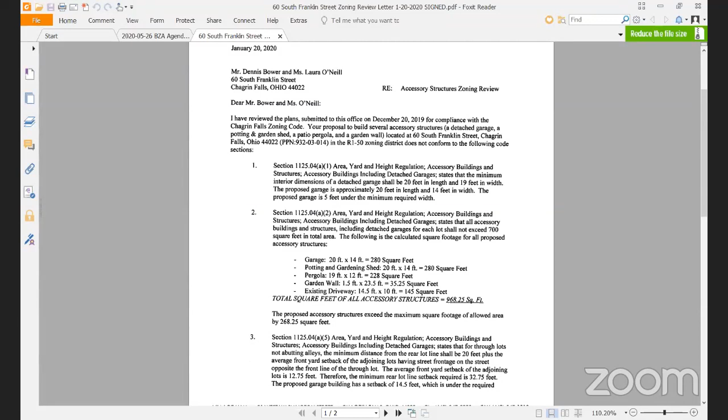So all that being said, the first application before us is that of Dennis and Laura Bower, 60 South Franklin Street. Rob, I turn it over to you. Could you please give us the background that it looks like you're able to project on the screen for us here as well? Yes, and I also want to start out by saying we have quite a few documents for each one of these 4 projects. I'm going to attempt to bring them up as we start to digest each project. If you want me to toggle between different documents, just let me know, and the screen will show what we need to show.

Starting off for this project, 60 South Franklin Street, the applicants, Mr. Dennis Bower and Miss Laura O'Neill, are proposing to build 4 accessory structures in their rear yard, which consist of a detached garage, a potting and garden shed, a patio, pergola, and a garden wall. This is in the R1-50 zoning district at permanent parcel number 932-03-014. They are before us today for a total of 4 code sections that require variance.

The first is section 1125-04A1, the area, yard, and height regulations for accessory buildings. This pertains to detached garage size. The minimum interior dimensions of a detached garage shall be 20 feet in length and 19 feet in width. The proposed garage is 20 feet in length and only 14 feet in width. So the proposed garage is 5 feet under the minimum required width.

Dale, I have Bill Childs coming. Would you like all three at one time or one at a time? I would do one at a time because I can only see one. Well, actually, no, I take that back. You could put all three of them on and I'd be able to see them if you add them. If my list is correct, I have Bill Childs, I'm promoting to a panelist, and the Bowers, and Mrs. Burt, promote to a panelist. If there are any other members in attendance, I see another hand. I will promote you, Brenda Anthony, promoted to a panelist.

Okay, so we have Virginia Burt, Bill Childs, Laura Bower, Brenda Anthony, and who's the other one? That's the extent of it. Okay. All right, so Laura Bauer, I can't see. She and Brenda Anthony need to get their video going. I requested the Bowers to unmute. Okay, who's on the screen for Laura Bower? This is Dennis Bower. Dennis, okay, gotcha.

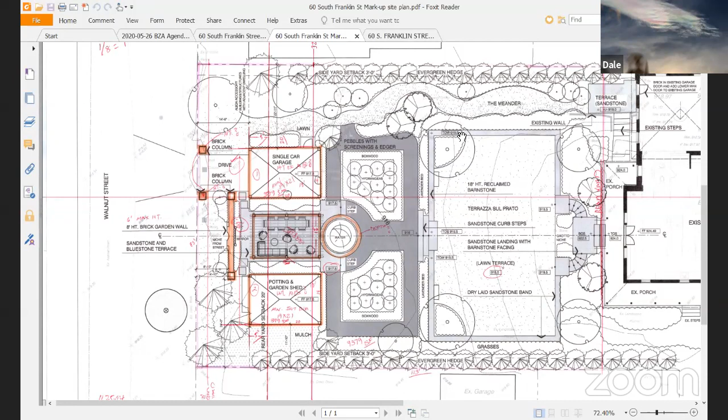All right, so I'm gonna ask each of you to raise your right hand. If you swear to tell the truth, the whole truth, and nothing but the truth in front of the Board of Zoning Appeals tonight, please say I do. I do. I do. Okay, I verified all four have been sworn in. Okay, thank you. I assume you're all tag teaming. We don't have audience participation yet. You're all participating in the presentation, is that right? That's correct. Dennis Bower, basically viewing, but I'll answer questions if I have to. Okay, I will turn it to whoever you would like to make the presentation, and you can chime in accordingly.

Good evening, everybody. It's Virginia Burt. I'm going to start off. First of all, thank you. I'm delighted to be here. Thank you for putting that up, Rob, because this is really the opportunity to look at this in its entirety. The first piece is we have this gorgeous heritage Italianate house. It, of course, is a signature house in your beautiful village. The idea here is to create an Italianate garden that goes with it.

So the first piece is, what is an Italianate garden? More than anything else, it has an axial geometry, a vista, geometrically patterned beds, it's designed to be inspiring all year round, it has a water feature, it has steps, it leads you down into literally a series of green rooms. To answer some of the questions in relation to the items on the agenda, there was a question about the driveway.

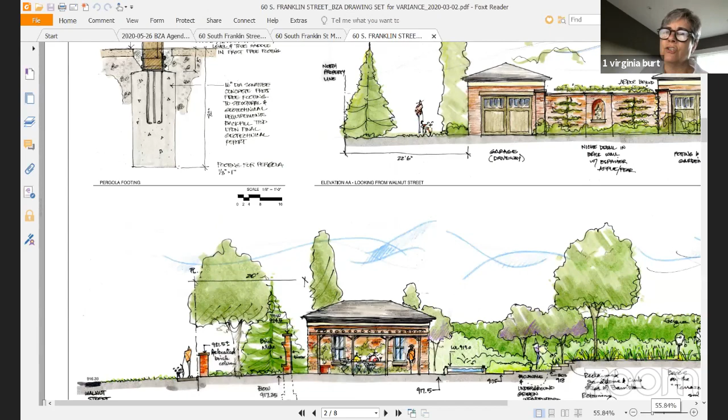Thank you. So elevation AA, what that shows you is the two garages in the wall and how we have created a niche detail in the wall so that two things happen. The first one is the niche. I mean, by dropping the wall to 7 feet, what that does is actually align the top of the wall with the two lintels, the stone lintels above the doors of the garage. So again, architectural consistency, the ability to unify and create, for lack of a better term, a catcher's mitt, both for the streetscape as one walks by, so the public gets something beautiful, as well as the interior of the garden. You can see the pergola, otherwise known as an arbor, beyond.

And, Virginia, did you just say that was 7 feet? The wall is 7 feet high? Yes, we dropped it from 8 down to 7. So that variance is only for 1 foot, not 2. For 1 foot, that is correct. And while we're on that, what would be the impact of making that 6 feet and not needing a variance request for that particular feature?

It will shrink. There's two things that happen. The first one is it will no longer align with the quality and the symmetry of the door lintels above the garage doors. So as soon as we start to do that, there is not a continuous line there. Number one. Number two, it will diminish the size and scale of the niche that is proposed, and suddenly it will look out of scale.

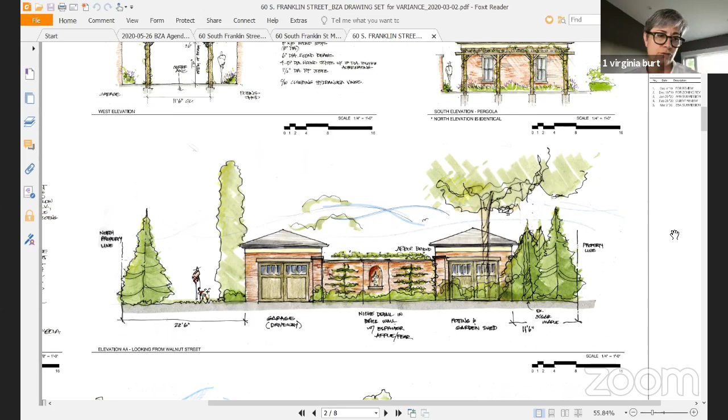Why was it originally 8 feet? We hadn't finished the design of the garage doors yet. When we first went in, we refined the garage doors, and at 7 feet, that alignment was important. Okay.

I just had one comment too. I think Chagrin Falls is a very pedestrian-oriented community. And I think with these type of design elements, getting them correct for pedestrians walking by is important, because if it's lowered to 6 foot, then if you're 6 foot or taller you can almost look over the wall, versus it should be a piece that you can feel the height and the scale of as you walk past. So I think it distracts or doesn't really solidify the design if it's too low, especially from a pedestrian scale.

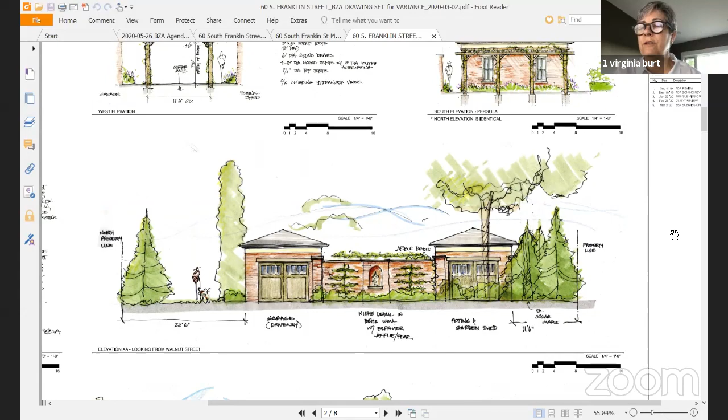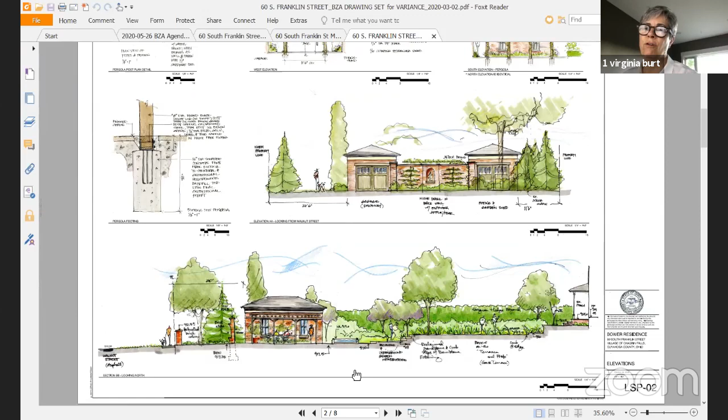Bill, knowing the height of the wall here, if we could go down to the elevation just below this one. Rob, if you could just scroll down and maybe shrink out a little bit. So you can see, to Bill's point, what 7 feet looks like in relation to a person out on the street. It is not overbearing, and it gives us an opportunity to have that beautiful niche as well. Because as soon as you shrink that, it becomes out of scale, which is the part I want to emphasize.

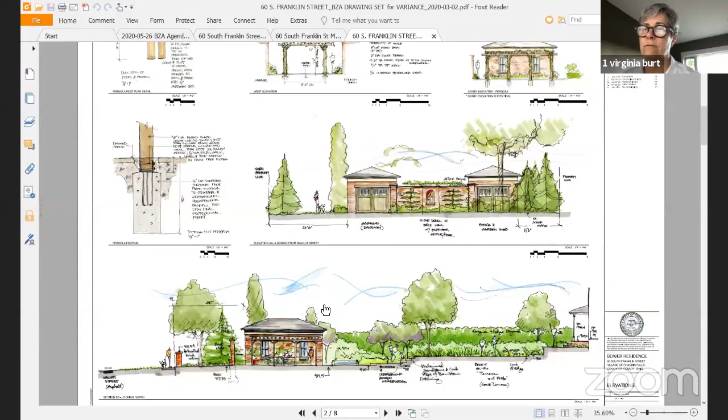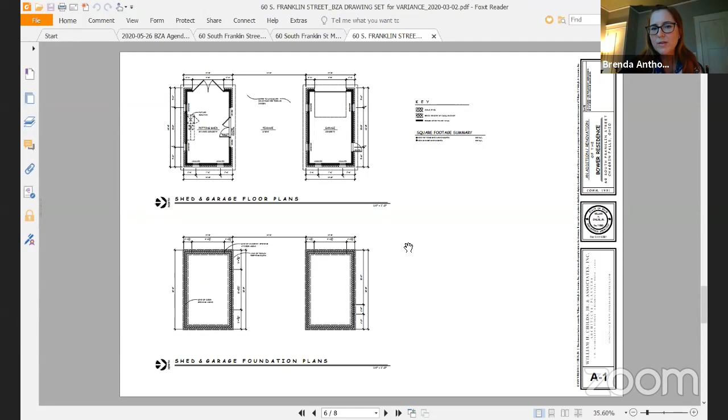Brenda, do you want to speak to the two garden sheds? If we go to the next two drawings, please, Rob. Certainly. As Virginia mentioned, it is a historically significant Italianate home. We wanted to represent that in the accessory structures. So they have some of that Italianate characteristic, tall, slender structure, tall, slender windows. The windows are proportionate in scale to the ones on the existing home. A hip roof. The roof will be slate to match the existing home.

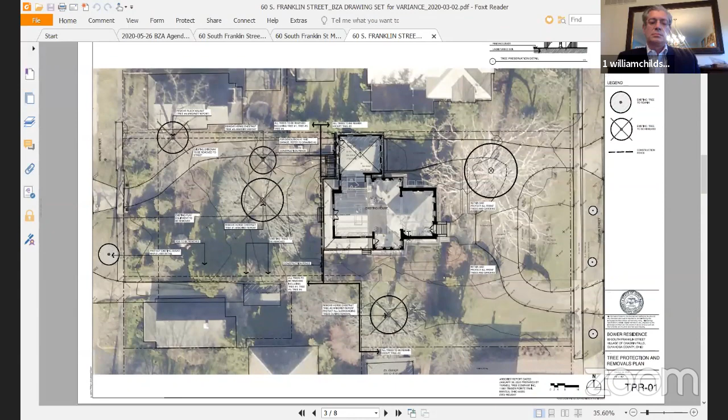Brick exterior. Could you go to the elevations of the buildings? Is that up or down, do you know? Down. Yeah. There it is. Back up. One sheet back. There we go. That's good. Okay. Over the doors and windows, we've done a small pediment that is similar in character to the ones on the existing home.

The idea here was just to do a structure that complements the existing Italianate home, but without all of the decorative details that the existing home would have, because it wouldn't be appropriate for these small garden type structures to have all the brackets and everything that's on the home, just enough to complement the existing home.

How did you arrive at the final square footage of the structure? Wait, what did you say? I'm sorry, I said, how did you arrive at the final dimensions of the shed and the garage structure?

The two structures are nearly identical, as you can see. The zoning code does require a garage to be 19 feet in width. However, this is not the primary garage for the home. The home already has a 2-car garage. This is just an accessory garage. We wanted to keep it, again, Italianate in character, tall and slender.

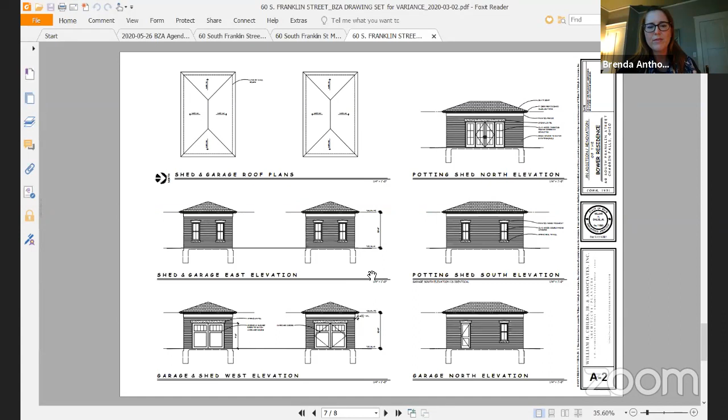If you're familiar with the existing home, or Rob can advance one more sheet, you can see we have an elevation of the back of the home. Very tall, very slender. And there is a height limit in the code as well. So we went as tall as we were allowed. And we had to keep it tight in order to maintain the tall, slender appearance. So the proportions are relative to the character of the existing home.

Is the intention to park a car in the garage? Yes, you can fit a small car in the garage. Has ARB looked at these drawings? Yes, they have, and we did receive an enthusiastic preliminary approval. Yes, preliminary approval was granted on February 18th of 2020 at their meeting.

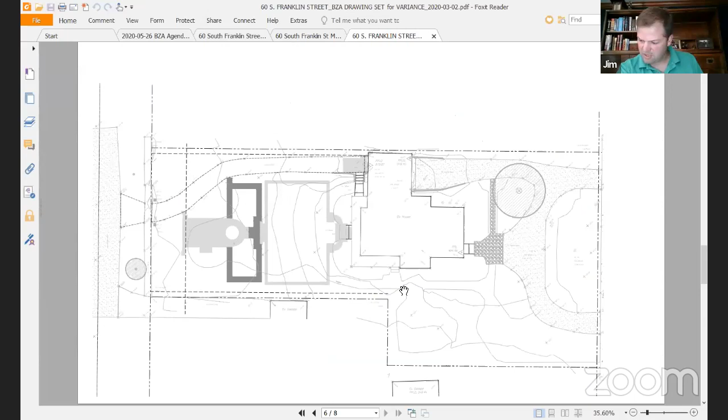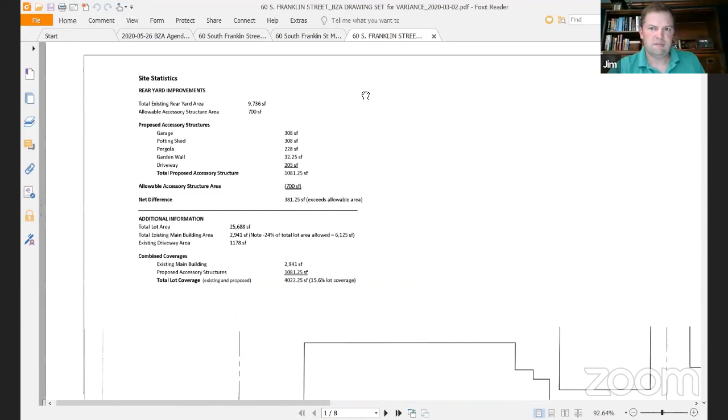Rob, I got a question. Sure. As far as the rear yard setback, we're using 14.5 feet, but the fence or wall, I guess, is within that. Is there a reason why that is not being considered because it is a fence? Correct. Yeah, the setback for the fence is different than the other structures and for a building.

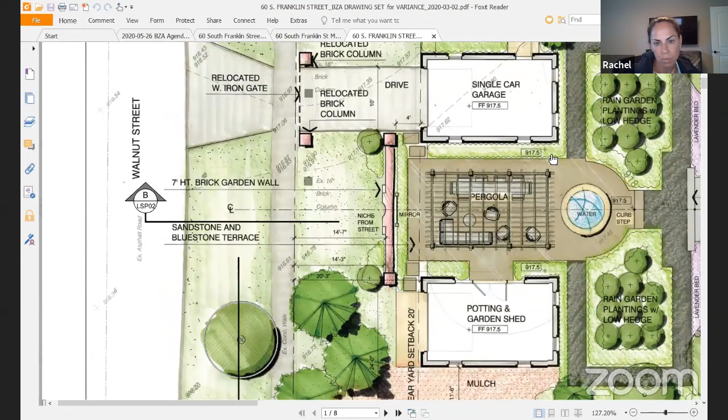Let me look into that question here for a second. I was also curious, a similar topic, I didn't see anything of variance about the fence, which is really a wall. There always needed to be a certain amount of visibility in a fence in our requirement. You can't have it solid, but does this not qualify for that? I don't believe so. We did address that when we did the review, and I could go back and find that exact reasoning. I don't know if maybe Dale had some insight on this wall not being a fence.

I would have thought they would've had to get a... fences have to have 30% airspace to let light through. That's why we do the shadow box fencing, right? When you see the 6-foot privacy fences, they're that shadow box, not a standard board-on-board fence. Right, so how does this one not have that requirement? I'm looking up the regulation for walls because I think it's looked at differently. I see. Okay.

We don't get many walls. No. Well, it's an important thing in an Italianate garden that they actually have garden walls as part of it. So we're looking to be historically accurate. The wall is not the whole way, it's only between the two buildings. Between the two sheds. Correct.

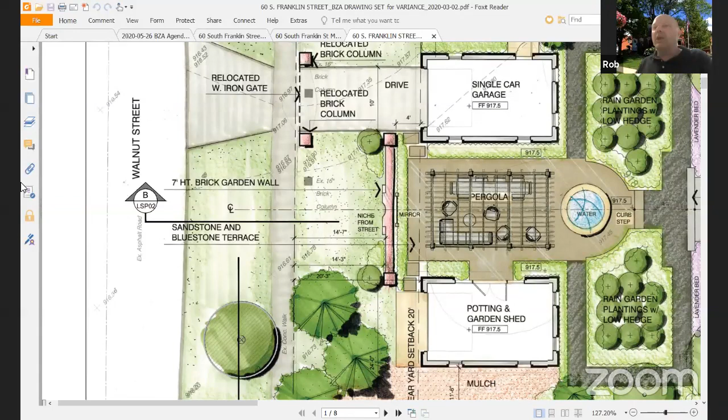Okay. Can you zoom out on this picture, whoever's controlling this? What would you like to do? Just zoom out a little. It's okay, puppy. You're talking about the dog or the picture?

There you go. And I do have an answer regarding the fence or wall. It is under 114802. A definition of a wall is a solid barrier constructed of wood, masonry, or other material. A solid fence is considered a wall. Because it's made of masonry, this is considered a wall. So we treated it as a wall when we looked at the entire zoning review. Okay. And it meets all code? Yes, with the exception of the height.

Right, okay, makes sense. The only issue with that wall relates to the extra foot above the required 6 feet. Correct. And actually, it's at 114807: walls greater than 6 feet in height or in excess of 100 square feet will be subject to review by the ARB. Design and construction of such walls shall be approved by ARB in consideration of the factors of safety and visual impact. So presumably the ARB has already opined on the wall itself. Did they opine on it at 8 feet or 7 feet? They opined on 7 feet and they loved it. Okay.

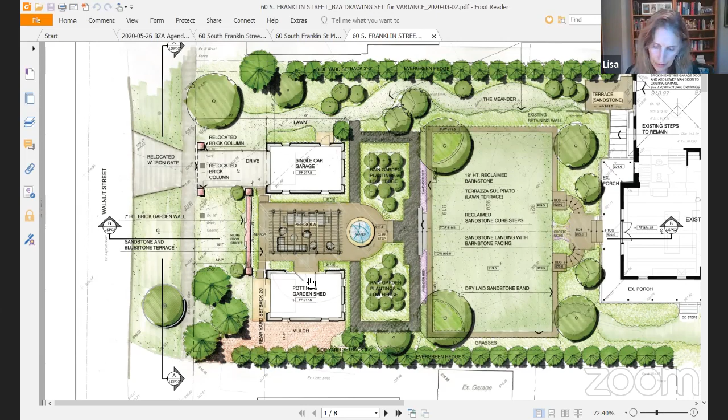So the potting shed looks like it's just over 20 foot, like 20 and a half foot from the rear setback line. It's 20'3" on the northwest corner of that potting shed. Okay. So the amount of variance for rear yard setback would be 12.75 feet, and that would cover both structures. One's a little closer than the other, yeah. Okay, a little less for the potting shed, but for the garage, it'd be 12.75 foot.

Gotcha. I think it really does show, and I think the important part is if you zoom out just slightly, if you could, Rob. You know, again, it's back to Bill's important point. It really does create the unity of the streetscape as you move along that. As soon as you start moving those garages even further back, there's no longer a relationship of architecture to street

or to sidewalk. So I am aware that we are indeed asking for variance, but it literally weaves into the tapestry of your historic district, and it allows us to create continuity as you walk along that experience as a pedestrian.

So in terms of the actual area of accessory structures, if we calculate in the removal of part of the existing driveway, what does that do to the amount of excess lot coverage? So the first piece is it's 9% less coverage than what is today. Today's existing drive is 1,178 square feet. The total proposed structure is 1081. So the difference there, let me just do the math. I did the percentage rather than the math, so I apologize. Just get my calculator.

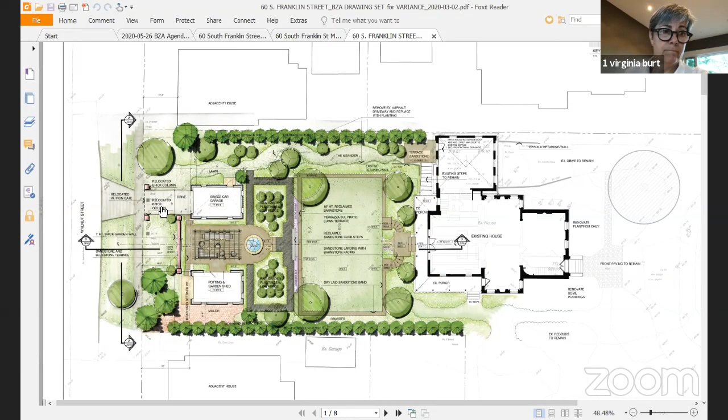Okay. I apologize to the applicants. We've been asking lots of questions. I didn't mean to get you off of your presentation. Do you have more that you'd like to present, or is this flowing the way you're happy with, that we're just asking you questions?

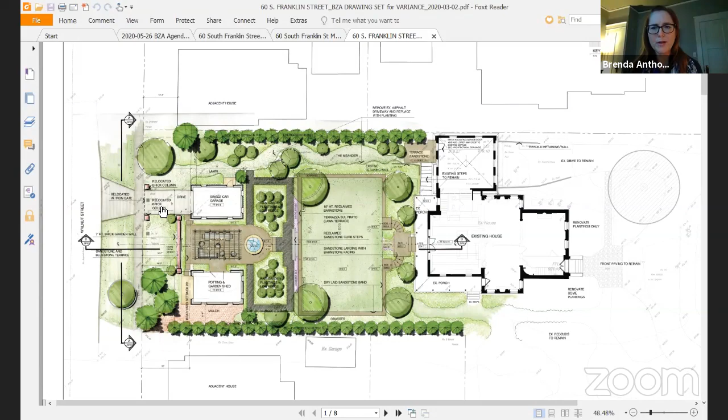Brenda, do you want to speak just to be able to show that elevation of a doorway to show how it aligns with the windows, and again, that it was very positively received by the Architectural Review Board? Are you talking the garage and potting shed or at the main house? At the main house. I just don't know whether people understood what might have been said there. Right. So that would be, I think, maybe about 4 or 5 pages past this. If Rob could advance the... Keep going. I believe one more page.

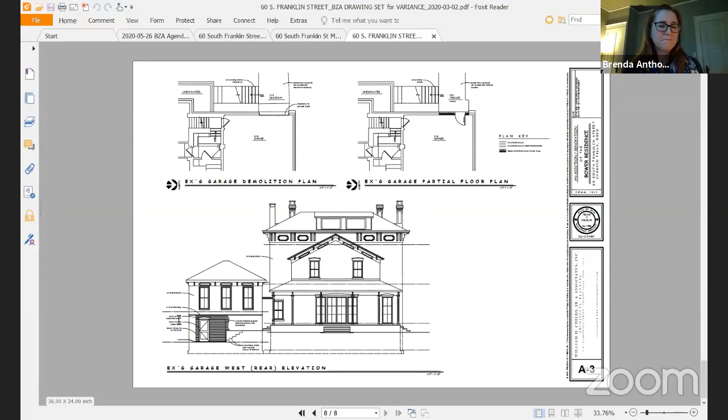This is just a little drawing showing, in the bottom left-hand corner, the back facade of the existing house. The bottom left-hand corner shows where there was previously a garage door that we're removing and just replacing with a man door in line with one of the existing windows above. That's really the extent of what we're doing at the main house, but it's just a reminder that we're eliminating that drive-through garage and all of that excessive driveway that currently exists in the back of the home in order to create this garden environment. I think that concludes our presentation.

Okay, thank you. Board, we've been asking questions throughout. Are there any additional questions that have come up that we haven't had a chance to ask yet? I did have a point to answer Jim Holdren's earlier question about rear yard setback to the wall versus the garage and potting shed. There are different setback requirements for a wall than there are for the building. So we used the building setback when we evaluated the building, and the wall does meet the setback requirements for a wall.

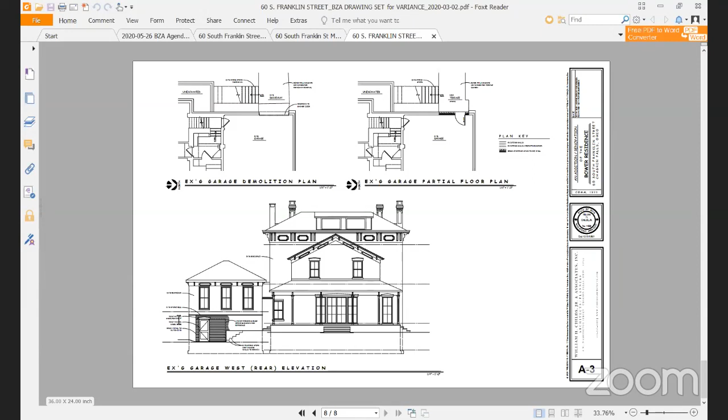Sorry to interrupt. Someone has some background noise. It sounds like wind. So if all participants who are not speaking could please mute and only unmute when you're the speaker, that might help with some interference. Thank you. That was probably me because there's a fan running. I turned it off though.

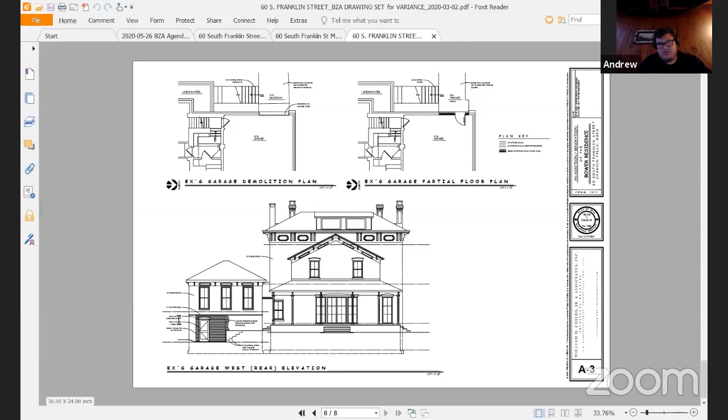I have one additional question. Why don't they have to have a variance from 3.5 feet? Because technically it's a street adjacent wall. Even though it's in the back of their property, it's adjacent to the front of another street. I mean, why is that different? I have to look at what you're referring to. So we define front yard fences, walls and hedges as not to exceed 3.5 feet. But it backs up to another street. So my question is more of a logistics question. Why are we saying they can be 6 feet? Because it's technically their backyard, but it's everybody else's front yard on that same street.

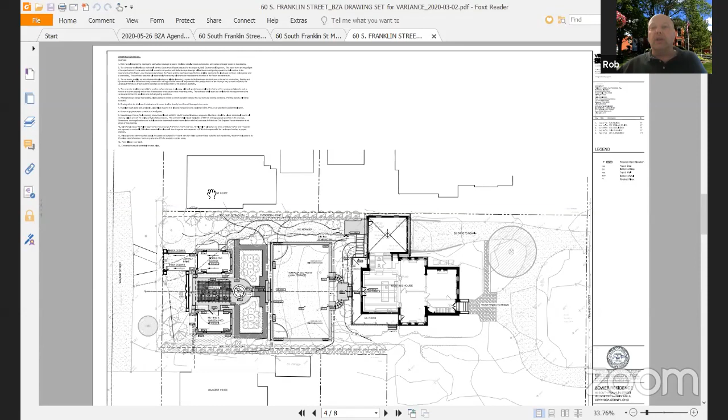It's evaluated on the property where it sits. So if it's a rear yard fence, then as long as it meets the rear yard setbacks and there's no other code language that regulates that further for a through lot, then we go by the requirement for the rear lot line, for the rear yard height. Okay, thank you. That clears that up for me. Any other questions from the board?

Yeah, I guess as far as the wall again, Rob or Harry, what does the code say as far as the distance? Because we're not even evaluating this. Could it be 2 feet from the property line and extend the entire length of the property? What limits that wall? I'm looking up the code section right now for you. Jim, the wall in the rear yard could be treated as a privacy fence, which has to be 3 feet off the property line. Thank you. Okay. Other questions, board?

All right, Christy, is there anybody in the audience in the waiting room who would like to speak in favor of the application? I'm waiting to see if there are any hands. No hands raised from attendees. Okay, is there anybody who would like to speak in opposition or neutrally to the application?

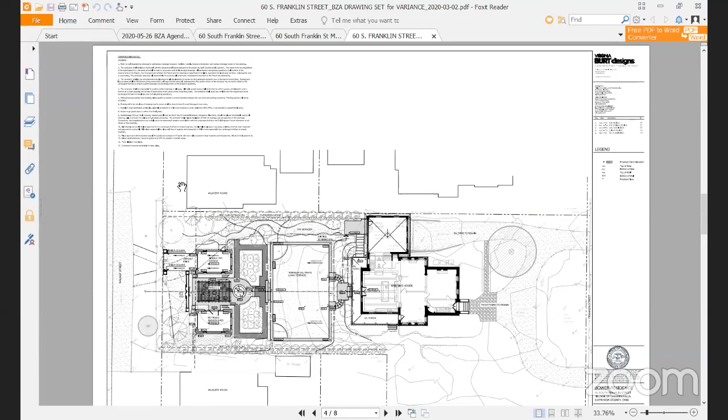I'm waiting for attendees to use their raise hand function if they would like to speak. There are no raised hands. And Rob, did we receive any letters or anything from neighbors? No feedback that I received. Okay. Final questions to the board, from the board. Anything else that anyone needs?

Board members, if I could just say one thing, we did send this application to the village engineer. He reviewed it for compliance. There were no issues with him. And also the Bowers did a consolidation because this was 3 lots and now it is 1 lot. 4 lots. 4 lots. Wow. 4 lots. Thank you.

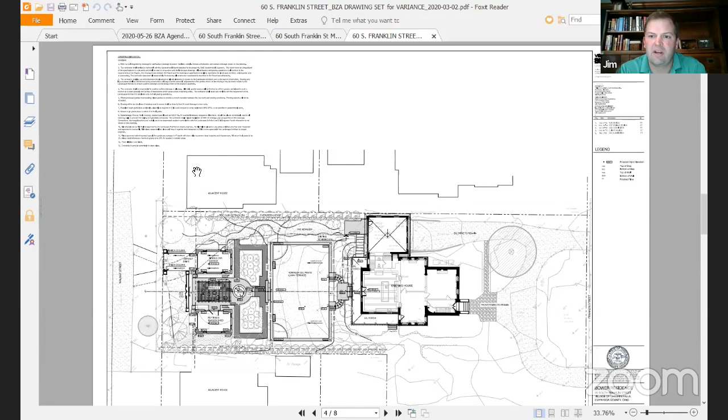Lisa, are you? Hey, wait, I got one. Oh, sorry, Jim, wait. Jim. I was just looking for, I saw it at some point, but what is the lot coverage now? I know they don't need a variance, it's way under the 24%, but does anybody know what that is? Yeah, I've got it right here.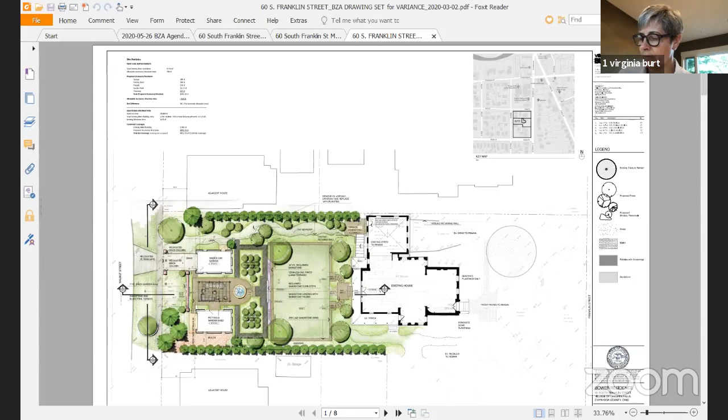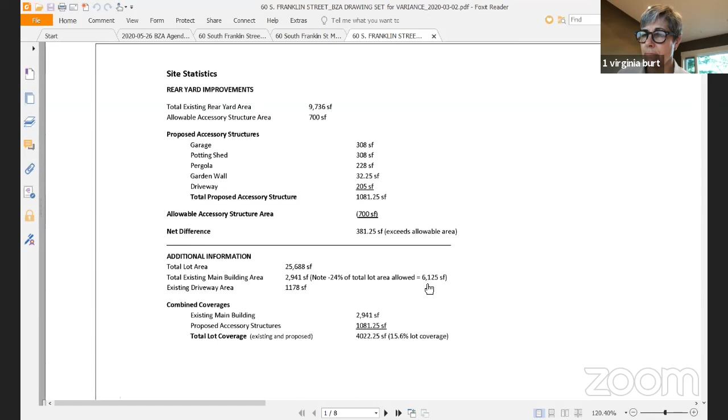The site stats are in the application, so not this drawing, Rob, but the colored one that's green. Page 1, please. Yep, there we go. So in the upper left-hand corner, the site stats, our total lot coverage is 15.6% versus the allowable of 24. Good, thank you. Okay, board, we ready for a motion?

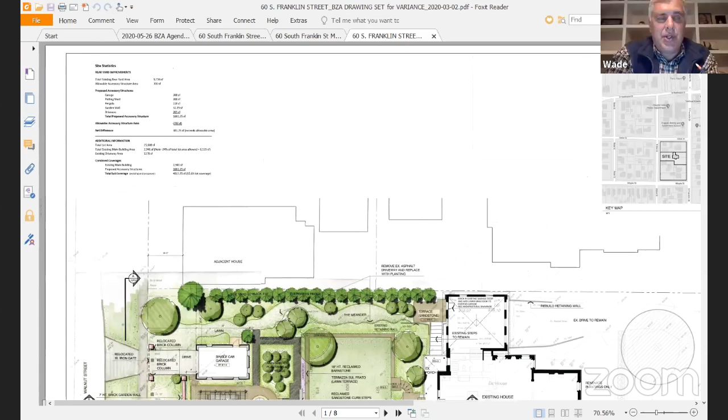Yes. I move, and you want to explain that we are always in the affirmative? Yeah, I mentioned at the outset, but just to reiterate, a board member will make a motion in the affirmative, and then each board member will vote yes or no to that motion.

Wait, this is Christy. I need to interject. We have one phone-in listener, and they don't have the option to raise their hand. So I need to ask them verbally if they have any comments. Sure, thanks, Christy. There's one person at number 216-272-8317. I'm going to allow you to talk. You may stay muted or you're free to speak.

Christy, before that person speaks, we need to get their name and their address, and then I need to swear them in. Okay, so if that person would care to speak, please identify yourself. No, they're not choosing to speak. Okay, I just needed to give them the option. Thank you. Oh, thank you, Christy. Okay, so then we will entertain a motion in the affirmative, and the board will vote yes or no on that motion.

I move that we approve the variance requests at 60 South Franklin Street with respect to 1125.04 A1, 2, and 3, and 1148.05B. With respect to the variances under 1125, A1 refers to the width and length of the garage.

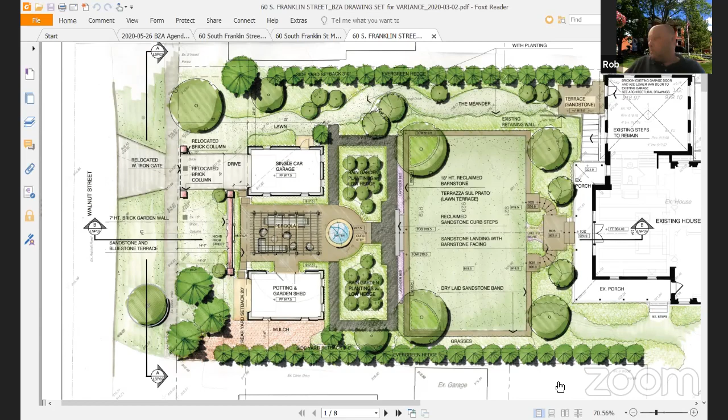I think with respect to 1125.04 A2, we're looking at a lot coverage decrease, even though we're in excess of what's allowed by code. It's actually a decrease because of the removal of part of the driveway, the creation of these structures. So it's actually a net reduction in the lot coverage over green space by 96.75 square feet.

And with respect to 1125.04 A3, we're looking at an approximate 12.75 foot variance request. The required setback is 32.75 feet, and we're looking at approximately a 12.75 foot variance in keeping with where these structures are going to be located to create the scale and the consistency of the garden.

With respect to 1148.05B, we're looking at a wall, which is going to be a 1 foot variance over the 6 foot height requirement. And that's what the applicant is requesting. With respect to these variance requests, the variance requests with respect to lot coverage and the rear yard setback are relatively substantial. The wall height is not substantial. And the size of the garage is less than what's prescribed by code.

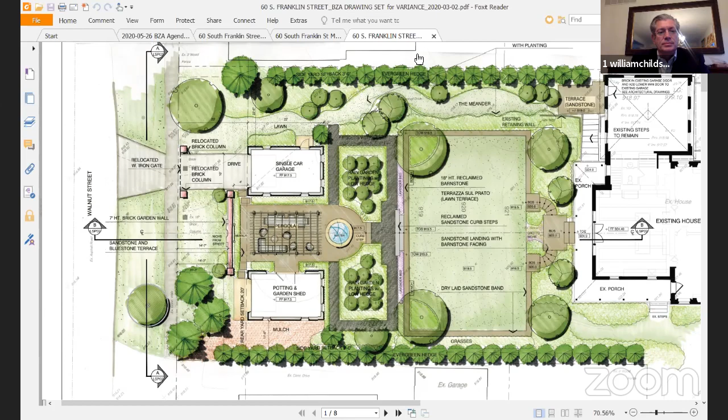Okay, questions from the applicant on that? No, I don't have any questions. Okay. Thank you all. Good luck to you. Thank you.

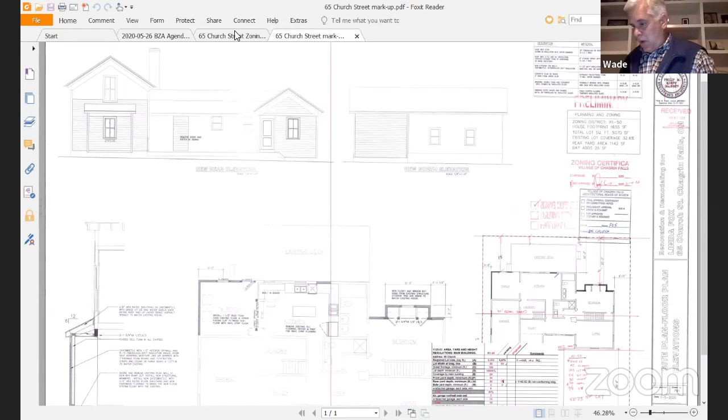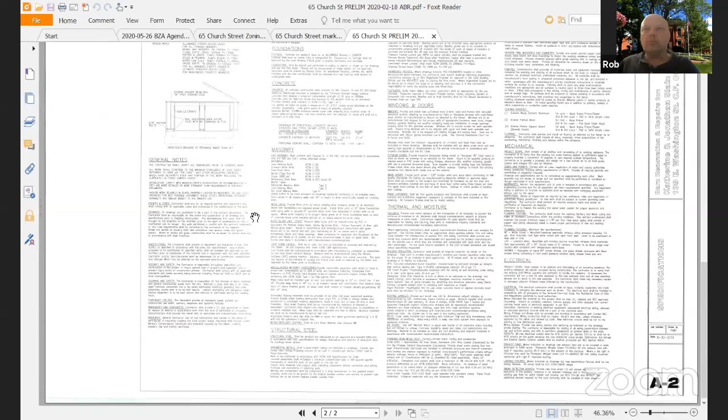And with that, we're ready to move into the second issue. Thank you. Appreciate it. Let me get my things together here first. Excuse me. Okay, up next is, all right. Stand by, let me load everything up here. Okay, good. I'm fumbling around as well. Okay, Rob, you're up. You ready? Give me 1 second, finishing here. See what I got here. Just making sure, okay, I don't need that. Okay, I think we can start off here.

All right, so before us now is the second application tonight. The applicant is Linda Fox. The address is 65 Church Street. So Rob, if you could give us the background on this, please. Sure. This is a residential structure in the R1-50 zoning district, permanent parcel number 932-01032. It's proposed alterations to the rear of the structure, enclosing a 3-season room and adding a small bump out to one of the rear facing rooms.

There's one variance required, that's to 1145.02B, additions to non-conforming buildings and structures. This house, as it sits now, encroaches into the rear yard a total of 14 feet and 9 inches into the 30-foot required rear yard. And the lot size is 925 square feet under the minimum required 6,000 square foot for a lot in the zoning district. They received preliminary approval from ARB on February 18th, 2020.

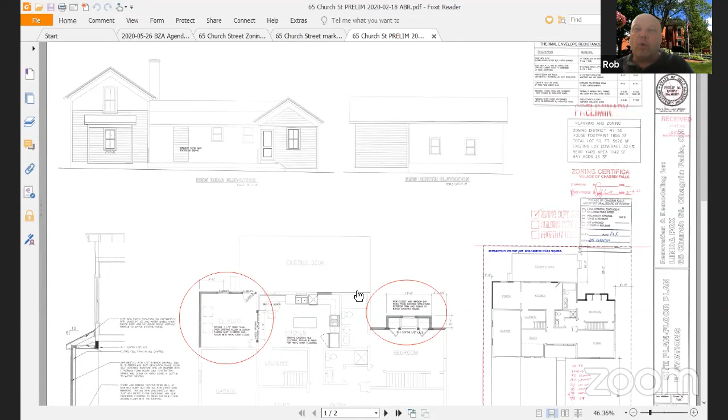The proposed alterations do not extend any further past the existing house now. So when you see where my cursor is now, that's the existing rear wall of the house. Right now, there is a screened-in area the applicant can describe with more detail, that they're enclosing at the same level as the back wall. And then the bump out for the rear bedroom will actually be under the existing rear setback for that wall of the house. But they are considered alterations to a non-conforming structure. Okay.

Christie, I don't know if anyone else saw, I assume you did, that Phil Koepf needs to be added. Yes, Dale, are you ready to swear in Phil? Yeah, let's see who else along with Phil would be speaking. I have two Linda Foxes on the line, the homeowner, I assume, so I can promote Phil and both of the Linda Fox identifiers since they're on the project. Okay, doing so now. I see Phil. If there are any other attendees representing this project, please use the raise your hand function in the Zoom platform.

Phil and Linda, can you open up your video so we can see? I'm sending them messages for video and sound. I didn't get anything. Hello. I see Phil now. I've invited the Foxes to speak and turn on their video. It does not appear they wish to. Phil, we can't hear you. You're still muted. Hello? There you are. We can hear you. Thank you. Phil, are either of the Foxes planning on speaking? Oh, it's only one, and it's Linda. I don't know why she's on two. Linda, are you there? Yes, I am. Hi, Phil. Hi. So she's got voice but no video.

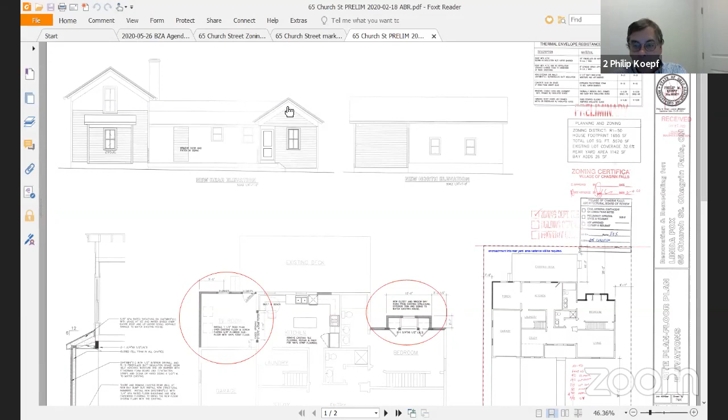Well, we'll just talk about it because it's pretty simple. If you look at the rear elevation of what is now the enclosed porch, the door is where the door is in the existing porch. The window that I placed was offset from the center line of the gable in the rear. That's been moved over to be directly under the gable. So the center line of that window right there, where Rob had his hand on it, is centered on the gable. Yeah, right there. So the window is moved over that way. Okay. So that's center line.

The other discussion, well, that was primarily what was discussed. I have drawings ready to go back to the ABR where we are considering a window on this elevation. Linda would prefer that it not be there. That's where the couch is going to go, and it's 15 feet from the neighbor's house. So in the ABR's presentation, I have this blank wall or a wall with a window in it that would be the same size as the window on the rear elevation. Other than that, nothing has changed.

The reason we're here is because anything we do to this house, because the lot is under the minimum lot coverage by some 900 feet, I think. And I can tell you from a historical standpoint that it originally ran straight through to the alley. And then at some point they took the rear part of this lot and added it to the rear part of the lot on the house around the corner that runs parallel to the alley. So the non-conforming part from a setback happened 50 years before we had zoning. And then when the garage and porch was added, I believe it was in compliance prior to the addition of the garage. It was done in 1990.

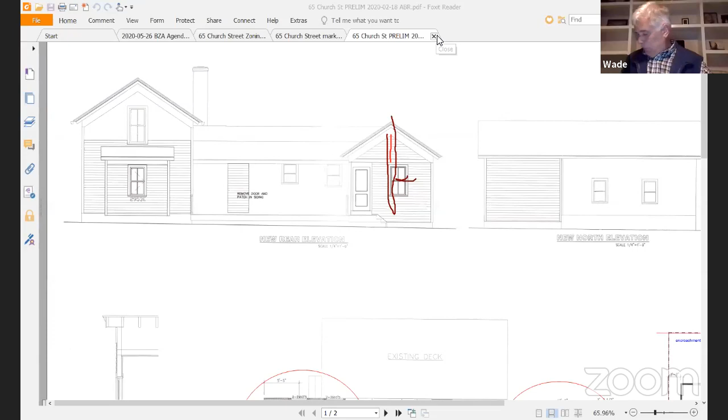Thank you. Thank you. Thank you. Good luck to you. Thank you. Appreciate it. Thanks for joining. Okay. Night, folks. All right.

Next up, our third application: the applicant is Paul Seagot, and this is 17 River Street. Do you need a second, Rob, to pull this one up? Yes, I do. Okay, so everyone talk amongst yourselves while we pull it up.

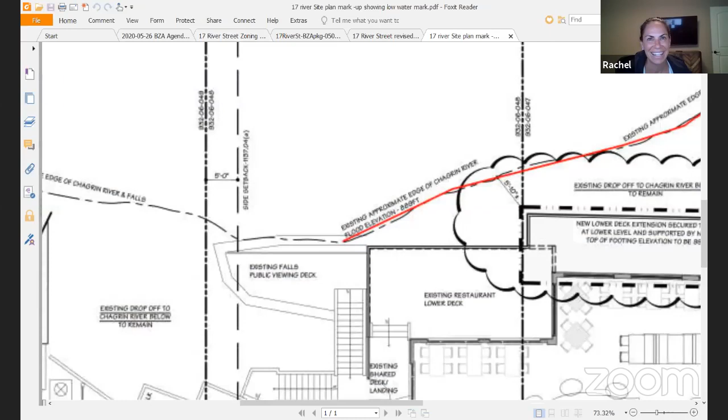Dale, where are you that it's still light out? That's a picture of me in Arizona 4 months ago. I'm using it as my background. I can do some other ones. Fancy. How about that one? Ooh, now he's in outer space where we always knew he was from. Or the Golden Gate Bridge. There you go. This one's too weird for me. You're in the middle of a leaf or something. This one that I took, it actually has the sun right over a saguaro, but you can't see it because the whole picture doesn't show up on the screen. That's very cool though. Yeah.

Just ice water. And this is my office at home. Nice picture of your office. My water had ice in it when we started this. It's now melted. My lemons have melted. I'm in my parents' place in the Adirondacks, and it was like 90 degrees today, and there's no air conditioning, and it is hot in here. Sounds terrible. Well, the minute we're done here, I'm going in the lake, so it'll be fine. But the ice melted about 3 weeks ago, so the water's about 40 degrees. Oh my God. I was gonna say, it's still cold. It'll feel refreshing. Oh, yeah. Okay, I'm ready to go.

Okay. All right, so take it away, Rob. Please give us the background on this application. Okay, this application is for 17 River Street, property owned by Paul Seagot. It's also commonly known as the former Jekyll's Restaurant property. The building itself is located in the retail business zoning district.

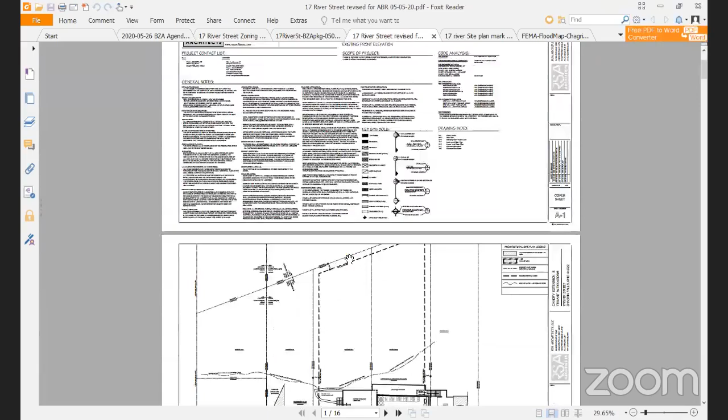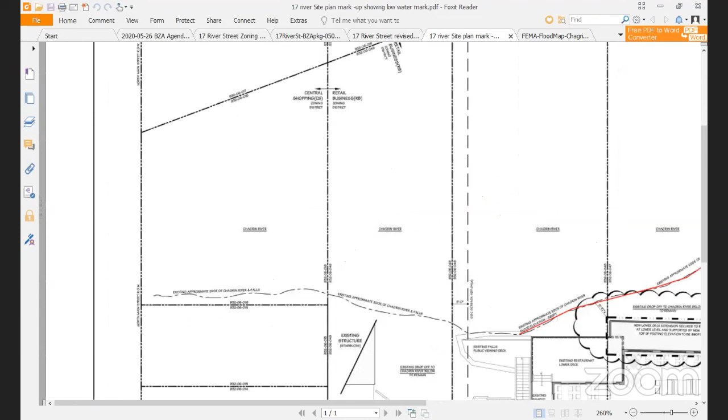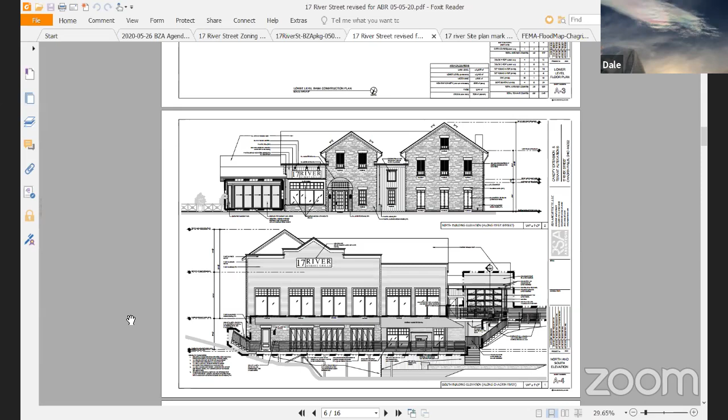If you are able to open up your video camera. And Rick, if you're not aware you're muted right now, it may be intentional, but I just wanted to let you know. Thought I was unmuted. Okay, I'm unmuted. That was me, I think she was talking about. Right, you're muted now. Now you're unmuted. Okay. Two Ricks. It always gets confusing. Did we lose Joe Riccozzi? Oh, there he is.

I'm here. Gotcha. Okay. So I would ask each of you to raise your right hand. And if you solemnly swear that the testimony you'll give before the Board of Zoning Appeals will be the truth, the whole truth, and nothing but the truth, say I do. I do. I do. I do. Thank you.

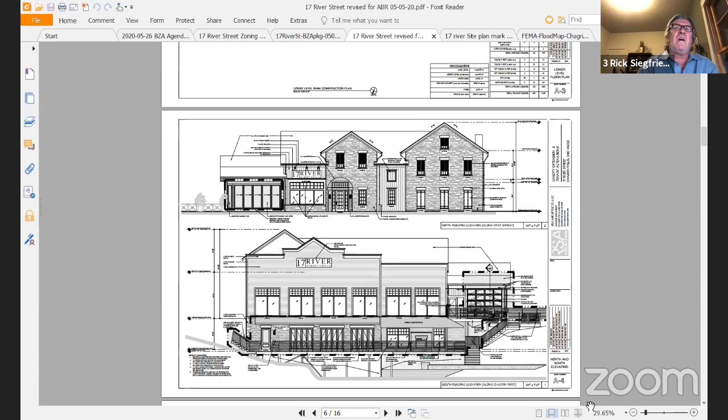Okay, you're free to proceed. Okay, Rob, are you able to put up the photos of the building the way it exists right now? I'd kind of like to start there.

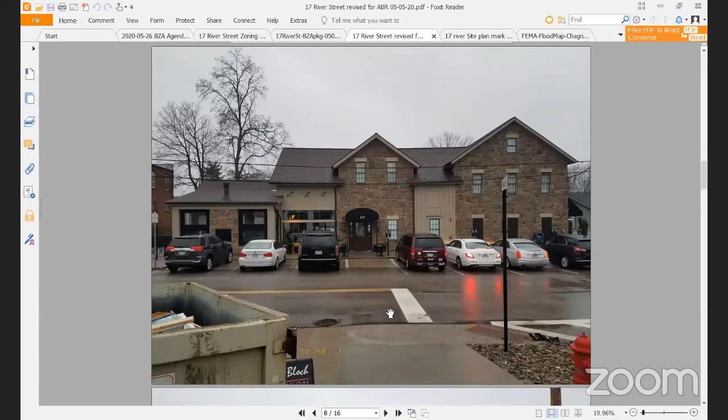Sure. Okay, perfect. And I don't think I can point. How do I get to that pointer tool? Bottom left. Rick, are you on a computer or a laptop? Computer. Well, it's a laptop tied into a big old monitor, so. Sure. At least on my screen, at the very top, there is a green box that says you're viewing Rob's screen. Got it. And then there's a pull down next to view options, and then you can select annotate. Annotate, perfect. All right. I've annotated on this once or twice.

So a couple things we're going to look at. Is this area right here where this fireplace exists, and then these drop down vinyl sheets. And we're getting rid of all that. The fireplace, there were some construction issues. It was leaking. There was some mold. It didn't really do much from the outside, and on the inside, it overheated the seats by the bar. And we want to get rid of the vinyl, the often maligned vinyl. So we want to get that out of there and install windows there, which you'll see when we show you the elevations.

And then if we could go to the next photo. Keep going. Well, go back up one more, I'm sorry. You'll see also, try the circle this time. Yeah, this is the same area. All of these vinyl drop downs in this area and the fireplace are being eliminated, and we're putting glass in. And some of it's being reused and repurposed from inside the restaurant, but this is really the one variance, because this is the part that's up against the street.

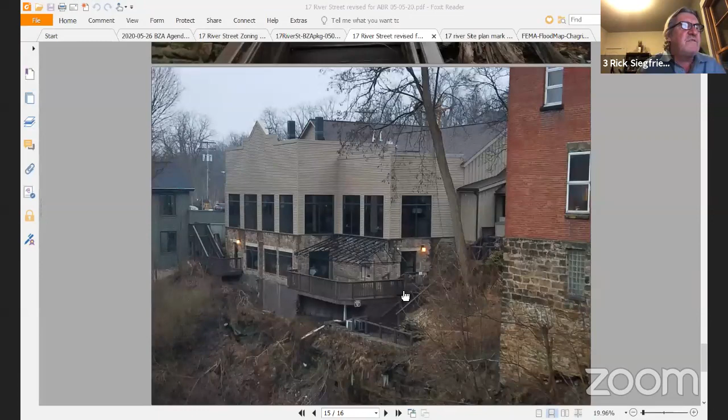And go one more, Rob. Go again. That stairway goes away. That goes away. So if you could come up just a little bit. So what happens with this new deck that we're proposing? And somehow I lost my ability to annotate. There it is. This new deck basically connects this existing deck and this existing deck, and you'll see it better in the drawings. So this is already here. This is already here. We're going to put a new piece in here that's 9 feet wide and connect those two. There's going to be some posts that go down to the ground, which is part of what we need to do to support this.

But to the best of our knowledge, we are out of the floodway, out of the floodplain. It will help actually block this view. This is not the best view of this building along the back here. We've got some exposed concrete. You can see these windows that exist. That's where the floor is at, kind of where the concrete stops and the stone starts. So by putting that deck in there, we're gonna block some of that view; the posts and the cross bracing are gonna kind of stop that view into there. The awning that you're gonna see adjacent to the existing frame for the awning is also gonna help kind of break that big facade up.

And you can't see my hand gestures, because I'm not standing in front of you. I missed that, just so you know.

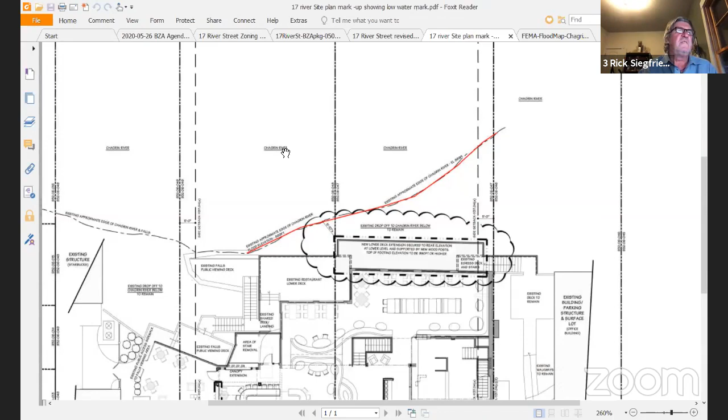And then there's gonna be a sign also up here, which was originally part of the plan when it became Jekyll's, but it just never happened. So I'm gonna try to keep this moving because it's been a long night for all you guys. But Rob, if you could now go to our drawings, the proposed drawings. So if you sort of zoom in on the deck area there a little bit, the lower level.

You're able to zoom in a little bit? Yeah, is this the view you want? Yeah, you know, it's fine. You're good wherever you're at. So this is, well, you just moved me, man. All right. Sorry, good. I'm done. We're good. It's kind of fun. We're all learning together, right? Yep. I'm making boxes I don't need.

So this deck in purple, is that the proposed addition? Right, this is new. This is what we're proposing. So while we're close to the edge of the river, sort of, we're way up above it, and the property line goes out to the middle of the river, so it's not really a property setback or anything.

The area variance and the use variance, I understand it. Rob and I had a talk about that today. We're really asking for the same thing. If you need the area, you need the use, and if you need the use, you need the area. But Dale, we're waiting for you to opine on that and how this is really going to work for us tonight. And then the other new piece of deck is this little tiny bit right here.

And again, you can see there's a door that goes out there and some folding glass doors. And it just gives people an opportunity to come out here and stand and have a look while they're at the bar waiting to go to their table or whatever's going on there. So it's just another way to get that ambiance going, because it's probably the best view of the falls in town. And there's a lot of good views of it. But that's what we're trying to capture there. And that is pretty much what it is we're asking for.

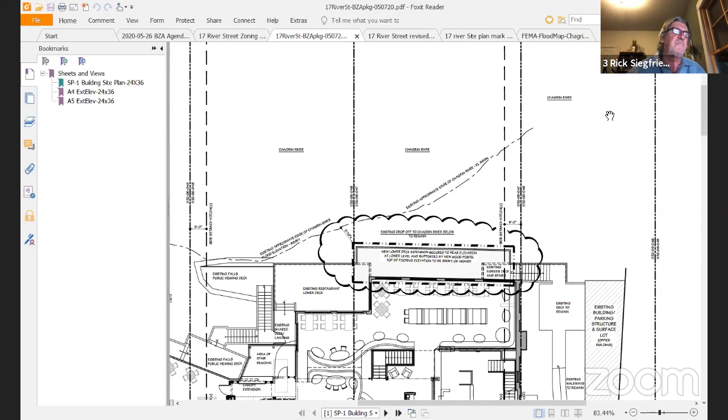Okay. Siegfried, while we're waiting, how many tables do you think will be added on this proposed deck? So on the lower deck, we've got 4 deuces, and on the upper part, we'll probably put 2 or 3 deuces or a couple of 4s or something. So I don't think we're going to add more than 20 seats. And if you look at what's going on inside, you'll see that it's a lot less compressed, and we'll take those seats out because we know that parking is a very sensitive subject. And I think, Wade, if we can do this work and get the same numbers that Jekyll's used to get when it was full, everybody will be very happy.

So there's no net new capacity being added? No net seating proposed, no. And we understand that's a fluid thing, but everyone has agreed at this point that we're not looking to add seats. We're looking to make it nicer. It was nice before, don't get me wrong, it's a great place, but we're just trying to upgrade a little bit. The new deck is connecting 2 existing decks. Correct, yes, on the lower level. Okay.

So everything we've tried to do in this restaurant, as I've said, I think to this group before, this is not a great time to open a restaurant. A lot of people think we're crazy. We're partnering with Joe and Rick on this from the Hyde Park. They're our partners on this venture. And while we're not significantly changing the restaurant structurally or physically, we are trying to enhance and make everything more about the water and the view.

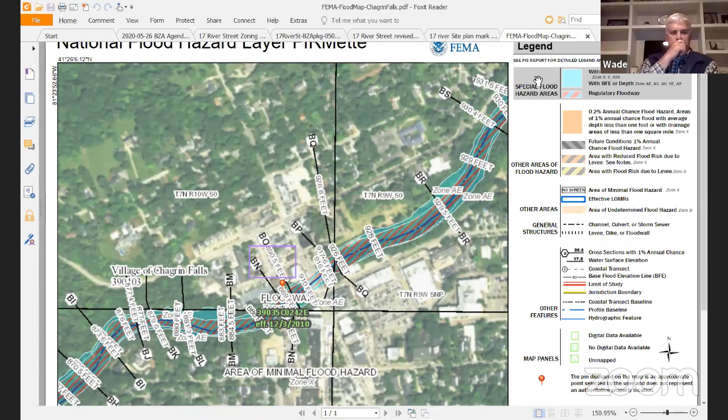If I'm not mistaken, almost this entire building is inside the riparian setback. So right here, where my cursor is, is the approximate edge of the water of the river. And I do have here the flood map showing some elevations. The elevations aren't really the question. The question is the water line, and then 120 foot in from that. So that covers the majority of the entire building. The good news is we're way above the water line. And you're a foot above the floodplain.

Rick, can you talk more? I think the lower deck is the biggest part of this variance. I mean, turning vinyl into windows and things like that is more of your decision to enclose things and not have flexibility for outdoor space. But the lower deck and drilling into the side of the river and in the river buffer, it's a pretty significant request. We don't get it very often. So let's talk about the elephant in the room.

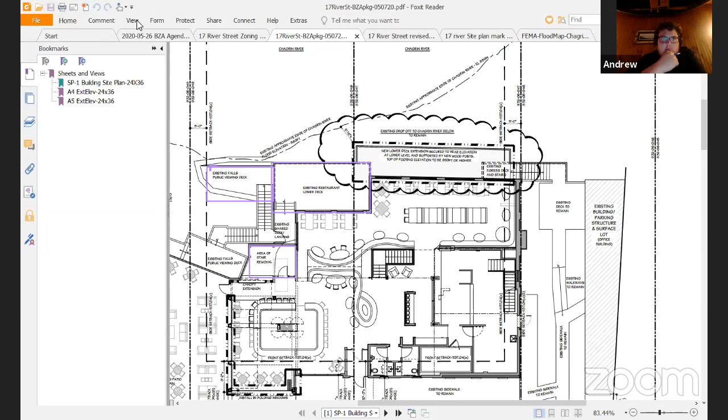Can you talk more about the engineering and what it takes? I think there's a lot of concern when you start touching environmental issues surrounding the river and the falls area. Just for reference, this is the existing falls viewing deck that's here. This is the existing lower restaurant deck that's here. And we're closer to the water, we're kind of right on top of it. We can go back and look at the photograph too, which would be helpful, because it is really steep here. But the good news is there's a lot of rock down there too.

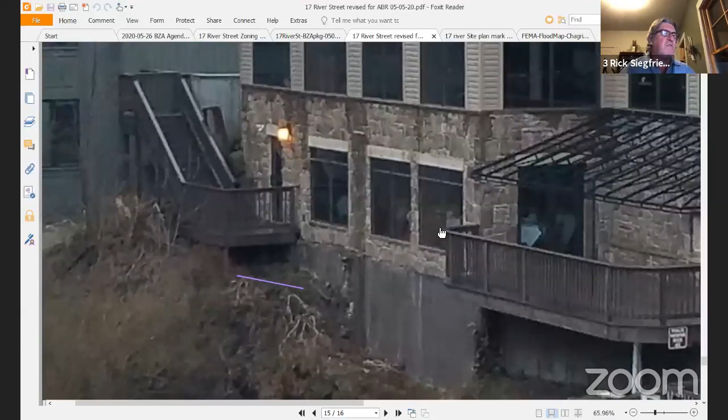So, let me erase those. I can do that. I'll get rid of them. You can get rid of them quick. So let's see, I'll just draw a line here. Now, our deck is coming right across here, and you can see how far down it goes as we go down the hill to where the river's at, with those posts. I'll catch back up to you here in a second. Hold on, give me a second. Oh, we're good. I'm just trying to capture the best view here. Never had this much fun before, Rob.

So those posts go right down here, and you'll see it on the elevation, but they're way up above the river, and you can see the rock in here. So what really has to happen is they've got to come down through here and dig this out, and it all gets dug by hand so as not to mess this up too much. The gentleman doing the work is the same gentleman who built all the previous decks for Jekyll's and for the village. So he knows his way around the side of the river here, and he knows it's a pain in the neck.

Rick, do you know when those other decks were built? Years ago. I don't know exactly, even though we did the Jekyll building job, but it burned down 8 years ago. Right. So within the last 8 years, let's say 7, because it took about a year with the insurance company. So all those decks were rebuilt when they rebuilt after the fire. Right. Okay.

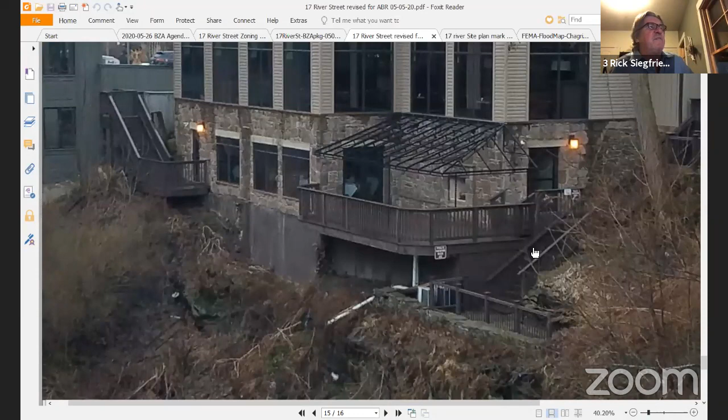And can you explain a little more how you get to that deck? Are you extending the current one there that looped, just extending it all the way across so you could go back and forth, or is there a new entrance coming in? Absolutely, just connecting the dots, connecting one side to the other. Oh, it's no wider than the existing? So the existing one's about 5 feet wide, and we're going to be 9 feet wide. So we're going to come out a little bit more, just so you have the ability to get a small table out there. Yeah, it'd have to be wider. Plus a swinging door. Right.

So, again, it's not so much the extra seating out there, which will be nice. But by having the deck there, because there's new doors going in there where those windows are, when you're renting that lower level or experiencing that lower level and it's a nice day and those doors are open, you've got that sound coming in and the fresh air coming in, and it just really enhances that entire lower level. Kind of makes it the place you really want to be.

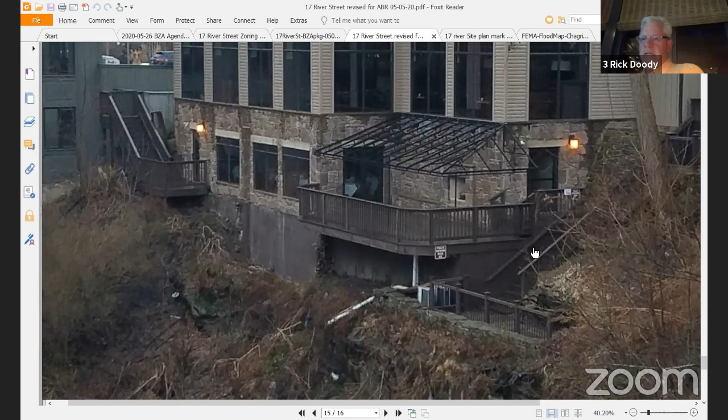And that's why we're not going too crazy. We're not trying to go 15 or 20 feet, we just want a little bit, to kind of open it up and make the river experience better. If you're down in that basement area now, it pretty much feels like a basement. Whereas the upper floor has a lot of natural light coming through the windows, the lower level doesn't have very much light coming in, and it feels pretty basement-like. We would like to enhance that and do more parties down there and make it a better experience for our guests. And so that's the reason for this.

That's because when the rain comes in the summertime is when the guests all run for cover and the dinner goes out over the rail. Hey, Rob, and Harry, could you talk about the role of the village engineer in all this? What part they would play going forward?

Sure, absolutely. If the variance is granted, the next step in this is to receive detailed construction drawings to show the method in which they plan to connect the new deck extension to the ground and anchor it into the bedrock. All of that information is prepared by a geotechnical engineer and presented to the village engineer, Tim Lannon, who reviews it against our hillside protection ordinance, as well as engineering principles.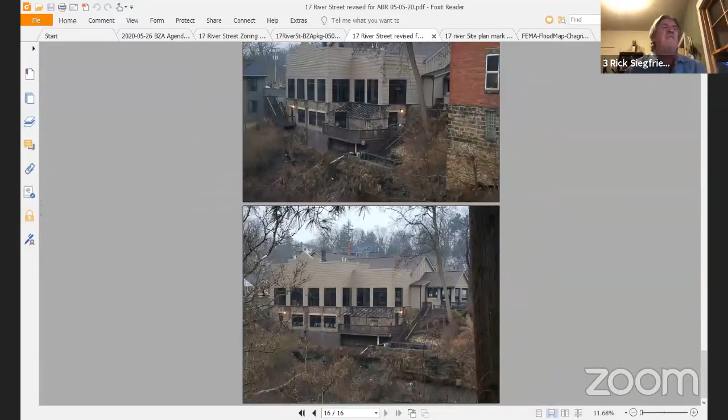Hey, Rob, could you bring up the drawing of the back elevation, the proposed revision to the photograph we're looking at now? Was that in a different packet? That's in the drawings. You're in the photographs. You got to get into the drawing packet. There you go. Just kind of come down. Go back one. Or down, I think right there.

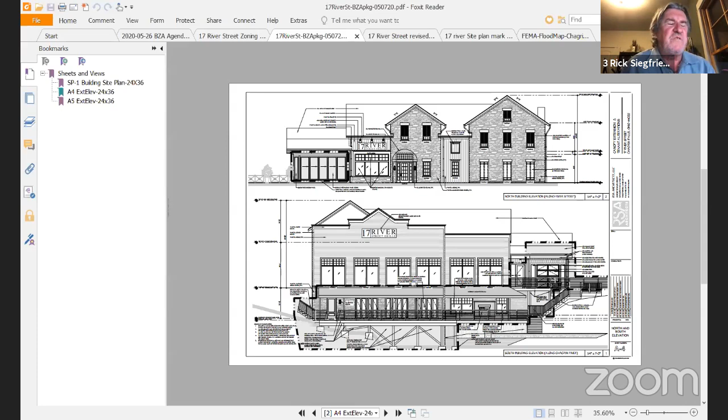So you can see what we're proposing there, and the reason I'm bringing this up is that we have gotten the assistance of a very well-known structural engineer, Isaac Lewin, who I've worked with for 35 years and Rick's worked with for 20 years. And we've looked at all this in terms of stability and how it works against the rock. We don't have a geotech report yet, but we've got some pretty strong opinions from Isaac on how to do this. And essentially it's like the rest of it's all built.

You know, you bring some posts down, you put concrete sonotubes into the ground until you hit the rock and you secure it against the rock, but then you brace the thing back and forth. So we are very comfortable that physically this thing's not going to be moving around, because there's way too much liability in it for all of us if it does.

So again, we're replacing those windows with doors. You can see here there is going to be a bit of an awning again just because of the rain issue, but it's going to be significantly structurally sound. I don't know if I said all that right, but you get my meaning. And the idea is to just make that elevation consistent across there.

If you remember what the photograph you just looked at was like compared to what this will look like, I hope you would agree that it's a pretty vast improvement across that elevation, which, if you're standing on the bridge between Starbucks and Dewey's, you know, the popcorn shop, everybody's looking at this. So we're very particular about it.

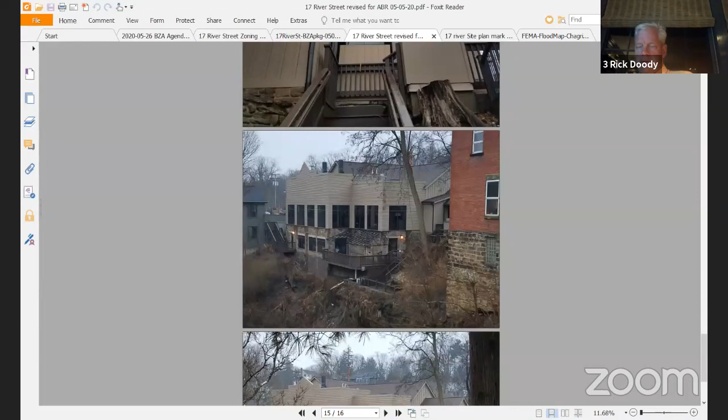I think, if I can answer it, Rick, I don't have a property line of it. I think the stairway is on our level, on our property line. There's an upper deck that sort of is an observation deck, if you will, for 33 West, the office building directly to the south. Is that right? Yes. West. To the west. And I'm actually going to rent an office in there.

And we signed a lease with Mr. West, who owns that building, to use his parking lot at night, or share his parking lot with the other restaurants in the theater. And so I think the upper deck is actually part of his property. They've been great to work with, by the way. We thoroughly enjoyed the relationship.

Right. My recollection is, and I'm going back 8 years when we looked at this, because we had to make sure there was proper egress out of the lower level, because there's 3 ways out of there, which exceeds the requirement by 1, but that there's an easement through there. There's an easement across the whole side of that building for access into the kitchen and everything.

So that stairway is not going anywhere. That's a required part of the egress system out of the lower level of the restaurant. And I think that's been in place for a long time. Okay. Thank you.

But it is going to block the view. That awning that you have, from that point, the view towards the falls is going to be blocked by your awning. So that's why I'm asking the question, who owns that?

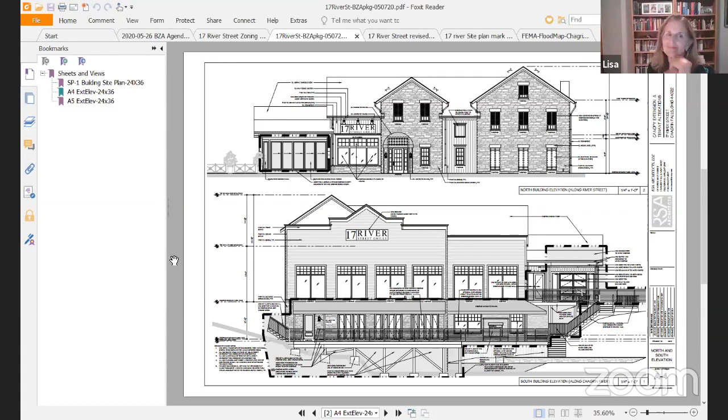We're up to our 4th and final application. The applicant is Mr. Greg McCarthy. Property is 36 Olive Street. Rob, when you get situated there, if you can give us the background, I would appreciate it.

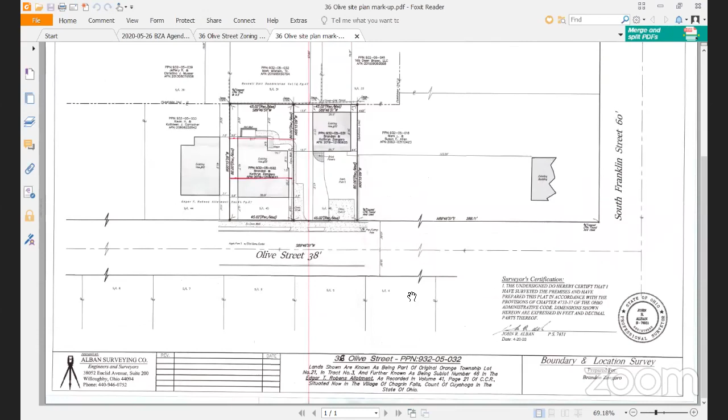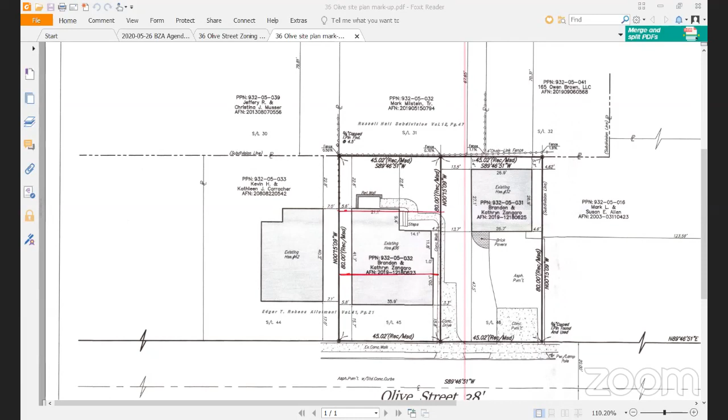Okay, stand by. Christy, I'm sorry if you needed me a moment ago, the Zoom dropped out my voice, but I'm back. There are no attendees with hands raised from the last project. Sorry, say that again. There's nobody for the 4th application? For the third. My sound dropped out when we concluded the third application. Typically at the end of the third, you were asking if there were any members of the public who wished to speak, but there were no hands raised. I just wanted that for the record. Oh, great. Thanks, Christy. Sure.

Okay, I believe we're ready to go here. Ready for you, Rob. Okay, this application is for Mr. and Mrs. Brandon Zangaro, 36 Olive Street. This is in the R150 zoning district, permanent parcel number 932-05032. They're proposing a new front porch alteration and an addition of a dormer to the front of the house as well.

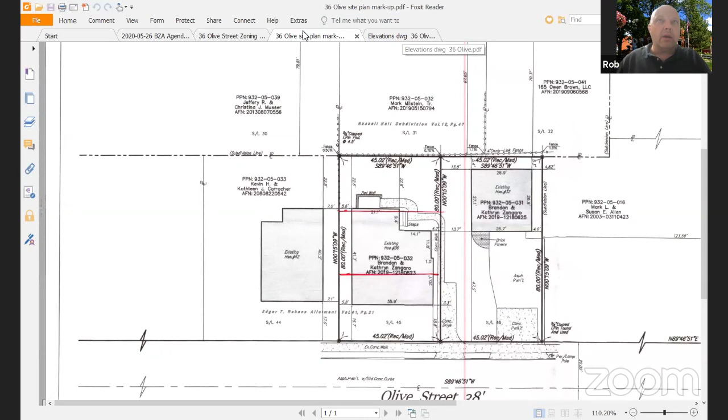This house is currently non-conforming, in that it doesn't meet the setback distances as shown in the drawing on your screen, which show the front and rear yard setback boundaries. So they need a variance to section 1145-02B of the zoning code. This matter went before the ABR on May 5th, 2020, and they received final approval for their proposal. And that's what I have. Okay, thank you. Is the applicant ready?

Christie? Stand by. I have Don and Greg. I'll promote to panelists. Dale, swearing in, please. Let me see if I can get them on the screen. Are there any other attendees who are speaking on behalf of this project? Brandon, I'll move you in. Don and Greg are muted. They need to unmute. Got it. And who was the third one? Brandon. I don't see Brandon yet. Neither do I. Brandon raised his hand but he dropped out. There's Brandon. Brandon Zangaro's online. Can you guys hear me? We can hear you.

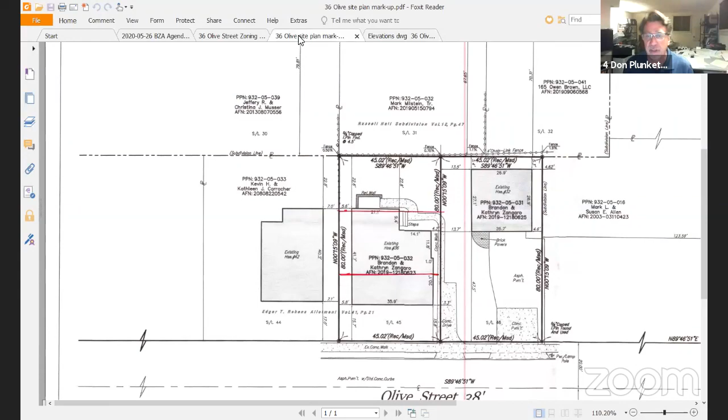Who's going to present? I guess I will, if I'm coming across clear enough. Yes, loud and clear. Okay. Sorry to interrupt, who's speaking now? This is Don Plunkett, the architect. A couple things. I don't know if we have a photo of the old porch, but the old porch had a bunch of closed windows. It kind of looked like a vacation home you'd see on a lake somewhere. And we wanted to keep it more in character with the neighborhood and the community.

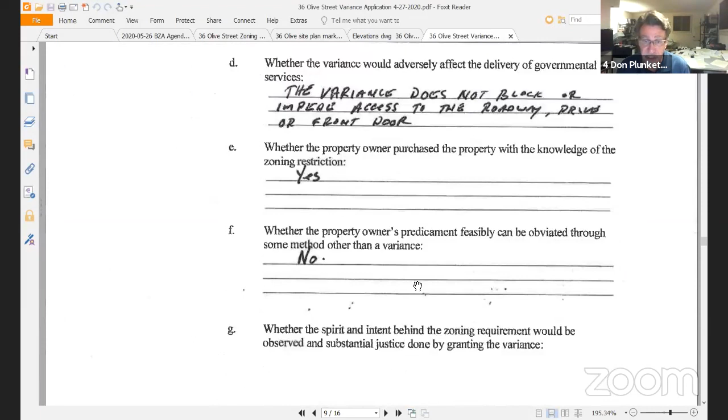In the presentation, Rob said we're putting a dormer on. We are, but it's going on the back. The dormer that's existing is the one in the front. And what we've done with the porch is we took part of it and used it for a mudroom we added. So we've reduced the porch a little bit. We've opened it up. And probably our biggest challenge is our steps were on the side elevation, and we've moved them to the front, which probably adds to our non-compliance because we come out further, but we're not any further than the adjacent.

It wasn't the next house, but the next two houses are out even further than we are. So we are coming out on the front as opposed to the side. We're making an open porch, adding some columns, trying to give it a little more character. And that's kind of our spiel. I don't know if you have any questions.

Yeah, bear with me for one second. Sure. Question about this property. Is it two separate lots between this house and the garage, one bedroom house, or was it ever combined? It's never been combined. And the steps that came out the side actually went onto the adjacent property. Right, okay. And I don't think the owners decided what they're doing yet. But as far as they own both lots, correct? It was sold together, yes.

This is a very unique property because it's really two, but it plays like one. It used to be a rental combination type property. I'm very familiar with the street, but I was just curious. I knew it was sold together. I didn't know if they had actually merged the parcels. They have not. Okay. How far out from the front of the house are the new stairs going to stick? 2'9", 3 feet. 3 feet?

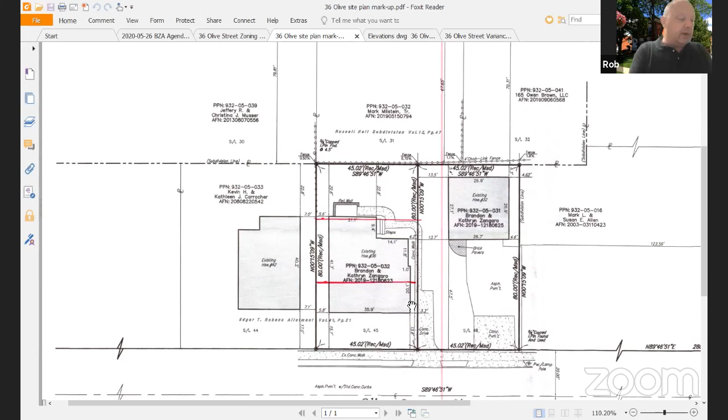Yeah, I just have a quick question, and I might have missed it, but I understand what's going on in the front, but what's going on in the back of the house? There's a dormer. We're raising, you can see on the east elevation, that portion. So we have a little more headroom in the bathroom, and we can actually do a tub shower in there.

Is that rear dormer identical to the front dormer? Yes, we're keeping it the same pitch as the front dormer. Is it wider? Yes. It runs across the entire bath. We're also raising the ceiling in the bedroom, and in the back bedroom we can actually put in an egress window. And my understanding is the ARB has passed on this. I believe it was a unanimous vote. Yes.

Other questions from the board? Okay, Christy, can you see if there's anybody in the waiting room, please? I'm checking. There are no hands raised in the waiting room and no call-in attendees. Okay. Ready for a motion then? I guess so. That's on me.